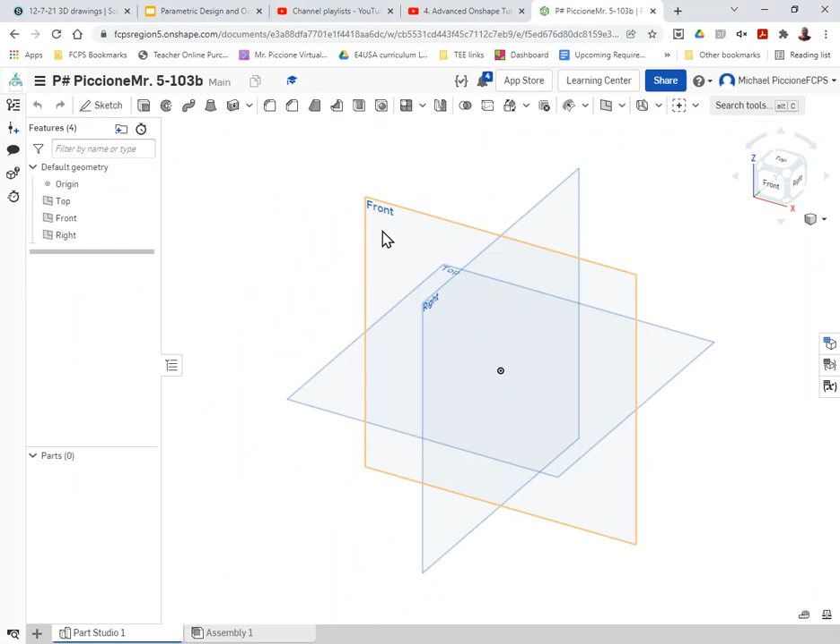So I've got my drawing. I'm going to create a new sketch on the front view this time. Hide my planes. And so first I'm going to start with my center line.

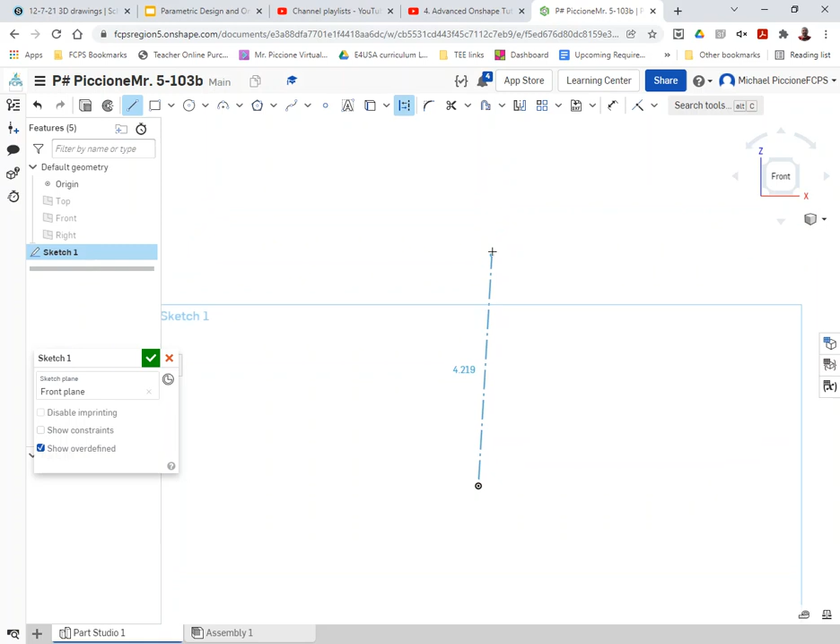To draw a construction line or center line, you want to turn on the construction button when you draw the line. It doesn't really matter how high you make it, you want to make sure it's vertical. And I can turn that feature off.

Now I said I'm going to draw rectangles that don't intersect the line, to the side of it, making sure not to snap anything on accident. So I have my 3 rectangles that are stacked, and I see the first one's 0.75, the second one's 2.25, and the third one's 0.5.

Dimension edge to edge, 0.75. Dimension from bottom to top, 2.25.

And the last one's 0.5. Again, I'm using the edge to edge method instead of clicking the line and dragging out. So I have all the heights dimensioned.

Now we need to dimension the length. But since it's a round object, and all round objects are usually listed in diameter, that becomes a little bit harder to do if you have to do the math. Luckily, there's a feature built into Onshape that does it for us.

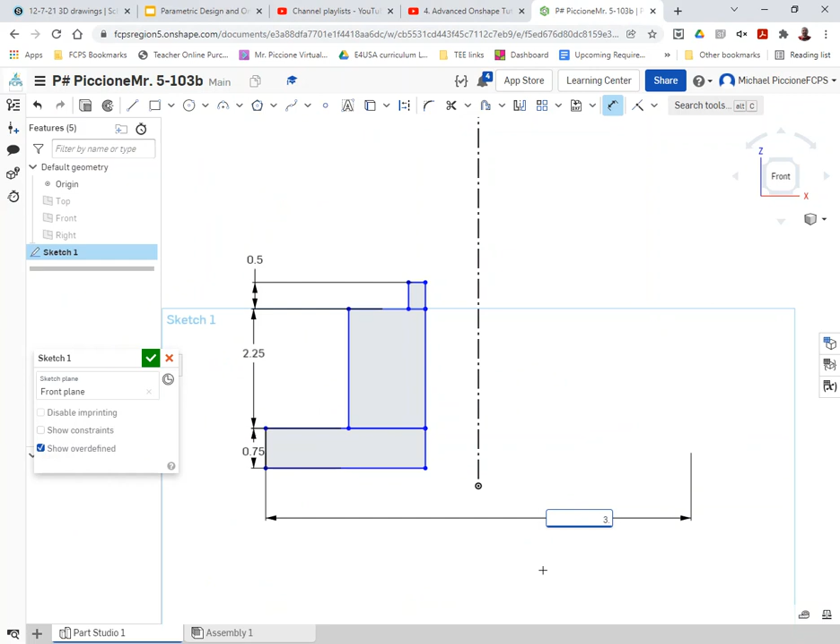And we said it was 3.5. I can see I drew it much bigger than necessary, and it shrunk it past the object. So if I need to, I can always drag it where I need to.

Let's reassociate some of my dimensions as needed. Normally, I would actually recommend dimensioning the distance from the center line to your inner dimension if it's a tube shape, which is 0.75, and then dimension your largest outer dimension. So 0.75.

Center line to inner dimension, .75. And it drug those apart, so let me just push this rectangle back outside. It really doesn't matter yet. So I have the inner and the outer - that's what matters. I'll fix these in just a minute.

I can see the big outer is 3.5 in diameter. The second largest cylinder is 2 inches in diameter, and the third largest cylinder is 1.5 inches in diameter. So dimension... Oh, I see I messed up because I dimensioned this as 0.75 from center to inside instead of diameter.

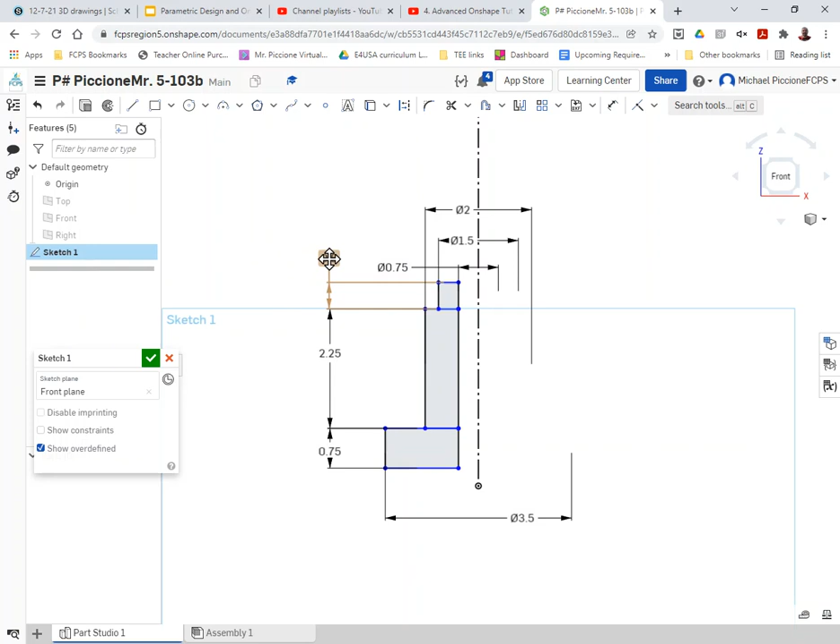Now the portion I'm missing is on the inside here. I could revolve this whole shape and then create a new sketch and do a revolve remove if I wanted to make sure things didn't get messed up. Or I can just draw the portion I don't want and remove it that way.

I can still see a lot of blue lines and dots in my drawing, which means something isn't constrained. If I click on one, I can probably drag it around and find out what's not constrained. I can see it's because I didn't constrain it vertically to the origin, and that can be easily remedied by just doing a horizontal constraint from the origin to the corner of my object. It's not necessary, but it just turns some of your lines from blue to black to fully constrain them.

Now if I go back and look at the inside of my shape, I can see that there's a taper missing on the inside that has an internal diameter of 1.25, a height of 1.5, and then a slanted piece to fit a threaded pipe or something inside at 15 degrees. So 1.25 and 1.5.

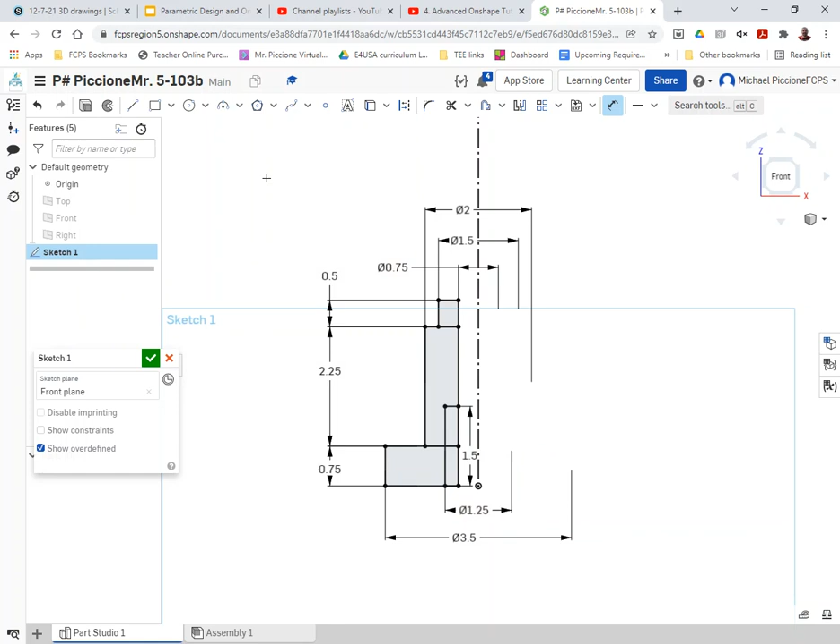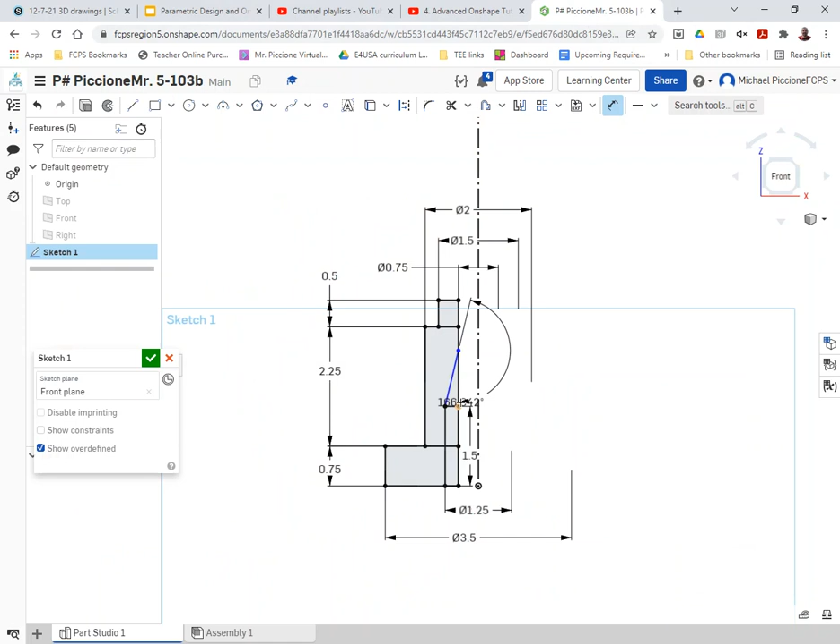Now I have an angled line that slopes towards the center, and I want to make sure not to grab any center midpoint snaps on accident, so I'll exaggerate it. Then I see that it is 15 degrees from vertical, so I need to pay attention to that when I dimension. Dimension, angled line, vertical line, and I want to make sure it's 15 degrees between the two.

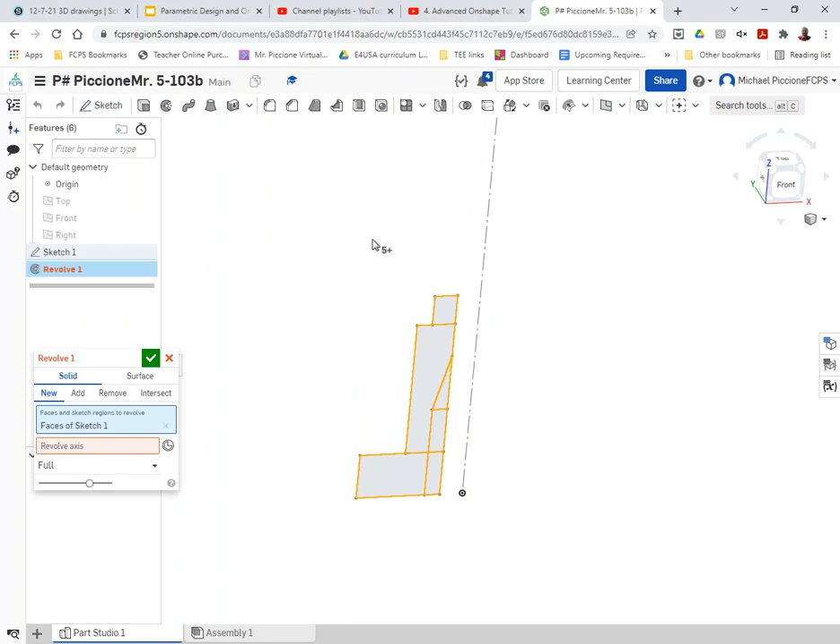So now I have all my dimensions done, and I can choose what to revolve. Revolve. I'm going to go ahead and unselect by clicking the X for the parts that it chose for me, because that's not what I want. I can go ahead and click my revolve axis because I know that's going to be my center line.

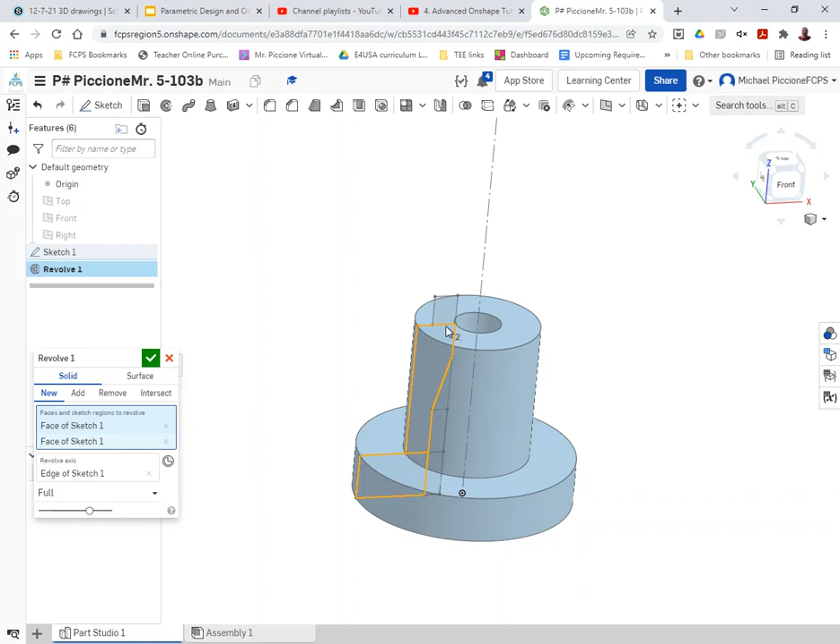Now I can click inside the faces or regions to revolve, but I want this outside base rectangle circle. I want this slanted part here, and then I want the top. I want to make sure not to have clicked the inside region that was removed and the slanted line. That looks okay. I want to do full circle and say okay.

So I drew the rectangle and angled line representing the internal taper, dimensioned it vertical and the angle, dimensioned the cutout with the diameter dimension. I revolved it, making sure to remove the internal taper. To show it so you can actually see the sketch,

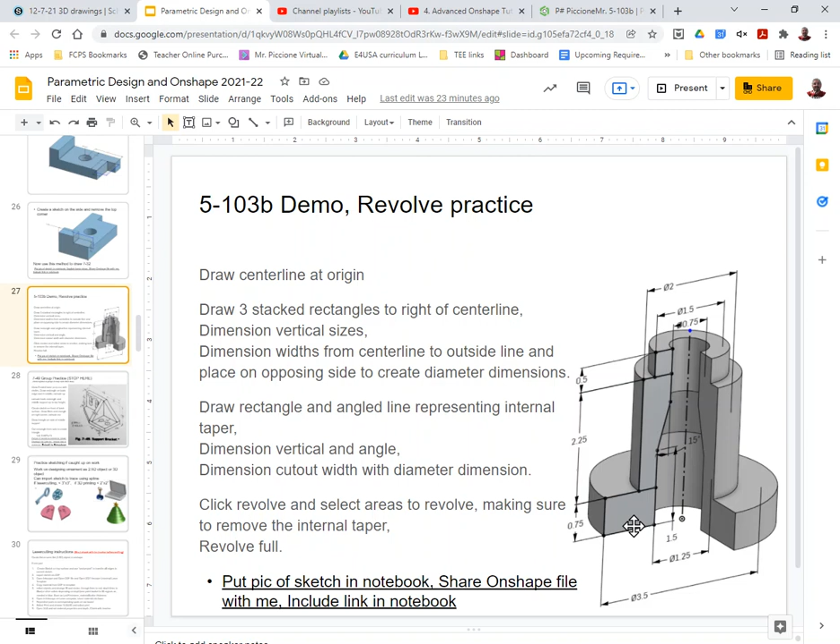you can use the section tool to remove part of it so you don't see it. So for example, if I roll over or turn back on my front plane and my right plane, which cut through the center of it, I can section it that way to see internally the inside of it.

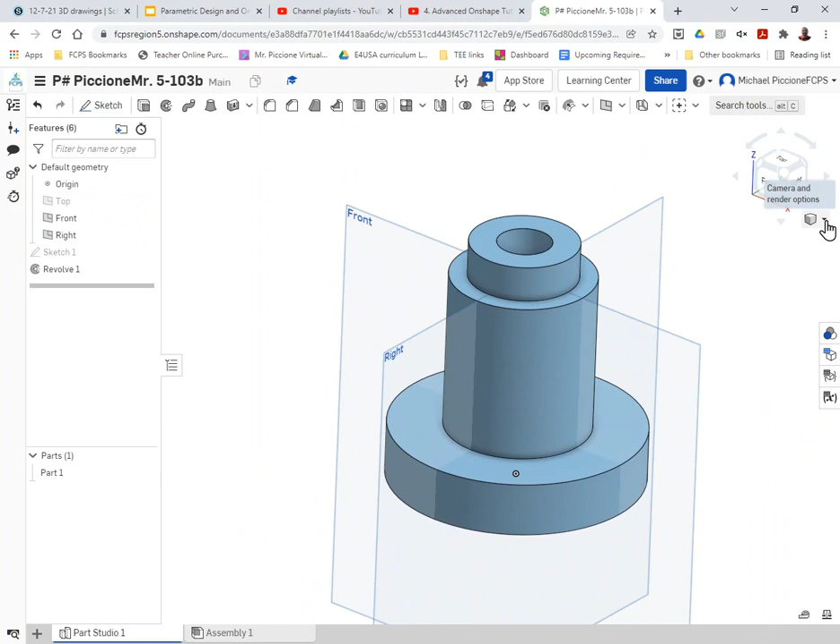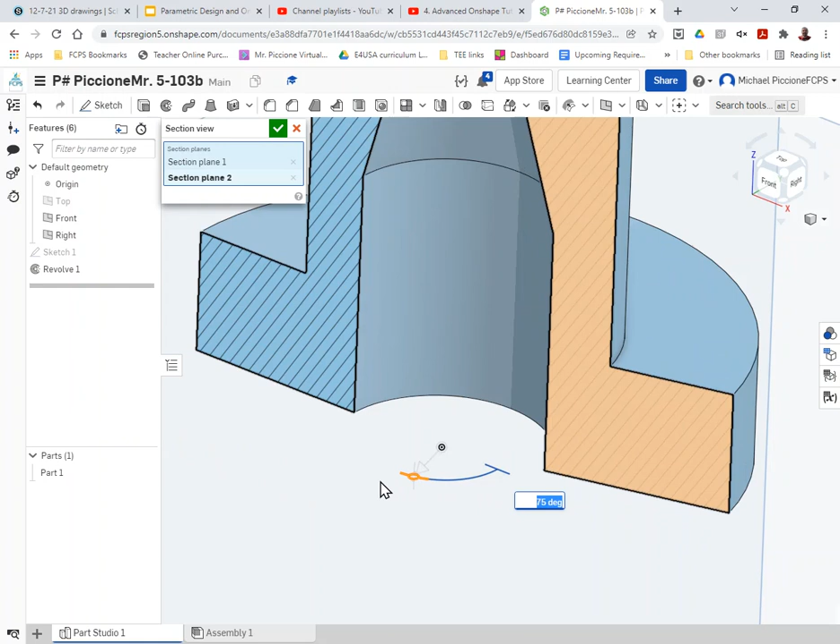So section view, front plane and right plane, and I can either grab that part of it, or if I grab the wrong piece there, I want to grab the other axis, that one. You can see it'll give you certain ones to remove. If I don't want that, I can just remove that section plane, and then I can turn my sketch back on and show the dimensions.

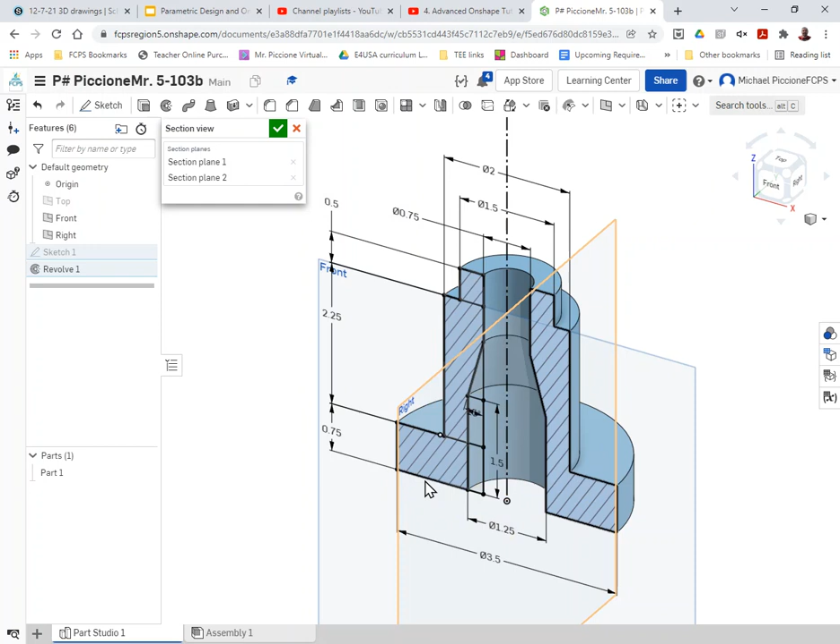And that's normally how you would portray it in your notebook, so I can see it's a revolved object. It shows it's being sectioned by the cutting plane lines here in the inside, and I can see the dimensions. Thank you for watching.